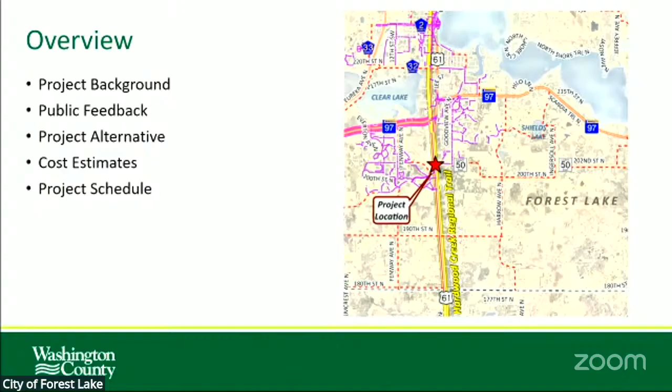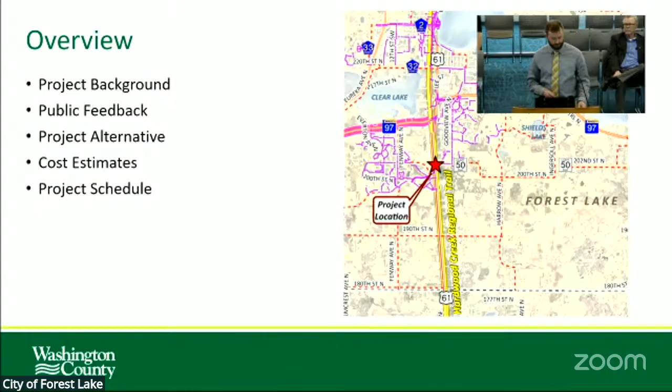On the map here, County Road 50 is in the southern portion of Forest Lake, just north of Headwaters Parkway and north of the new environmental center there. So that's the intersection at hand.

Some quick background: Trunk Highway 61 is the main north-south highway here with a 50-mile-an-hour speed limit and high traffic volumes. The intersection is currently side street stop controlled, which can make access onto 61 very difficult, especially for vehicles wishing to make a left onto 61.

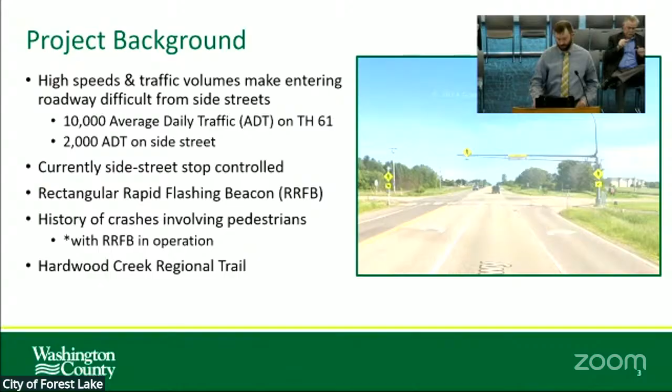There's an existing rectangular rapid flashing beacon at the intersection to help facilitate pedestrian crossings, although there's been a history of crashes involving both pedestrians and vehicles when those lights are activated. The Hardwood Creek Regional Trail is along the west side of the intersection, and that is the county's most visited and well-used regional trail.

So it's really a three-way cooperative project here with the Minnesota Department of Transportation, City of Forest Lake, and Washington County. As we mentioned last time, we've been busy seeking outside funding opportunities to make these improvements possible. To date, we've secured 2 grants and are working on a 3rd application. Previously, I noted we secured $2.67 million between some regional solicitation funding as well as through MnDOT's local partnership program grant application for improvements on 61.

The 3rd item we're currently seeking is an additional $2 million through the Community Project Funding Program through Congressman Stauber's office. So that's the 3rd chunk we're really striving to hopefully secure.

Quick project goals: reducing frequency and severity of crashes, provide safe, clear, and accessible crossings for multimodal users, and maintain acceptable vehicular operations well into the future.

So a quick refresher on public engagement. We held our first open house in July and second in September of 2025 down at the Headwaters Parkway Service Center. We had good turnout and received a lot of good feedback both in person and online, and really what we learned is that 61 is a barrier between the east and west corridors at this intersection.

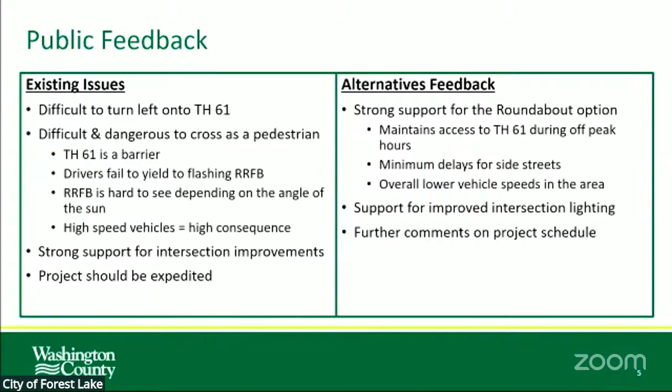The first open house really focused on existing conditions. We heard a lot about the difficulty making left turns, how dangerous pedestrian crossings are even with that rectangular rapid flashing beacon currently there, as well as a lot of excitement for improvements at this intersection.

In September, we brought forward 2 alternatives between a signal and a roundabout to solicit more public feedback on those 2 items. During this engagement, we heard a lot of support for the roundabout, largely due to their ability to maintain that side street access onto 61 during off-peak hours, as well as minimizing vehicle speeds through that intersection for all users, not just the folks that hit those red lights at the signals.

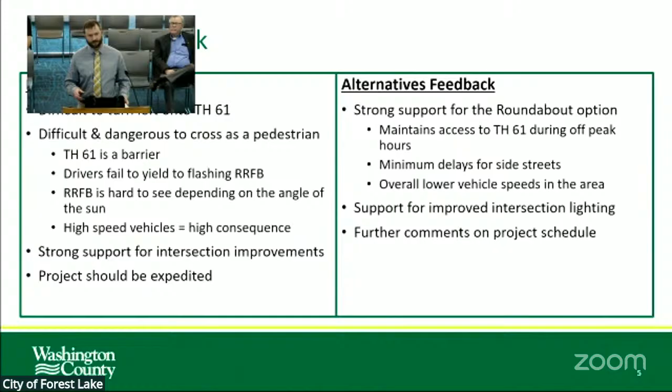So that's kind of what I have for background and public feedback. Any questions from City Council on those 2 background items?

Okay, hearing none. So with the roundabout addressing the needs of this intersection and being largely supported by the community, the project team developed several options for the roundabout at this intersection.

So on the screen here are 2 same but different layouts. Really the difference is how that roundabout is centered or structured within the existing trunk right of way. On the left image, the roundabout is shifted to the east, which puts part of the roundabout, the circulatory, partly outside MnDOT's right of way. But what this does is allow proper approach lengths on the west side of the intersection.

The image on the right shifts that roundabout back centered within the MnDOT right of way, which, to maintain those appropriate approach lengths, obviously shifts the road to the west slightly as well. So the option on the left results in shorter turn lanes for the future potential public works site on the south side, on the east side of the intersection, and it also causes a couple complications with some existing city utilities out there.

Neither of these alternatives are perfect in that sense. But one of the benefits of centering the route is it provides a little more flexibility to shift the roundabout location north and south, to really avoid the sanitary sewer crossing, which is the key piece because of the existing grades and size.

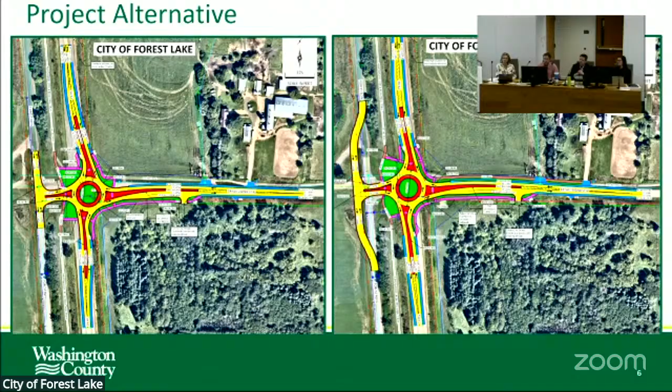I just think these roundabouts are challenging for pedestrians, and that has to be an important component of whichever one we choose. So is that just a policy that state and county won't help fund? This is a state and a county road, and we're talking about pedestrian safety, and that's why we're spending all this money. There's just no willingness to fund that.

Mayor, members of the council. At these single lane roundabouts, it's been Washington County policy not to put them in, but it's also been MnDOT policy as well, due to the fact that they can add more complications to the crossing. You'll get pedestrians coming up, some hitting the buttons, some not. Then are the pedestrians going to hit the buttons or just walk out? So it's one of those factors.

I'm not saying they don't improve safety, but if this was a multi-lane roundabout, they would be recommended. So it's not that they're not supported, they could be done as almost optional, but it's not something we'd recommend if this was purely a county or MnDOT decision. Mayor, the rectangular rapid flashing beacons at Goodview and Highway 97 were requested by the council at the time, and that was the first project in the state of Minnesota to install those devices at a trunk highway crossing on a roundabout.

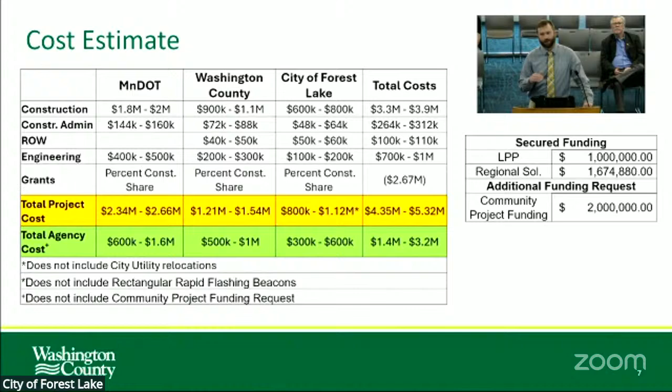The thing to focus on here is the City of Forest Lake column, the third one over. The yellow row is total project cost without any grants applied. The city share here I put as a range because we're still early, between $800,000 and $1.1 million, and that would be your all-in cost.

That includes engineering, any right-of-way needs, construction administration, and construction itself. The green row is a best guess of approximate construction cost share per agency based on our preliminary estimates, splitting up the $2.67 million through the breakdown here.

So that $300,000 to $600,000 is an approximation to get you a ballpark of where you'd land after those grant figures get divided. As mentioned, that doesn't include the future $2 million ask. If we get that funding, it's applied the same way, and everyone's cost shares come down.

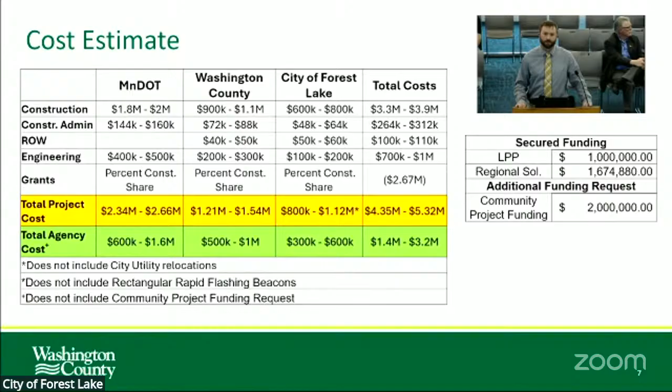As we've discussed, if the city desires to install these, we looked at costs, and it's roughly $165,000 to $200,000 for construction. Obviously there's also maintenance: vehicle maintenance, vehicle collisions, vandalism, and replacement of solar panels, lights, and the like.

Any other questions on that? Otherwise, that's the estimated cost, which was not included in the last slide. I kept them separate, so this would be additional costs.

Does staff have a recommendation yet on this part of it?

And add up the math with how many times that other one got hit—sorry. From 2022 up till now, I haven't finished yet, but it's been hit several times so far, about $1,000 worth of damage, not including Public Works when they respond.

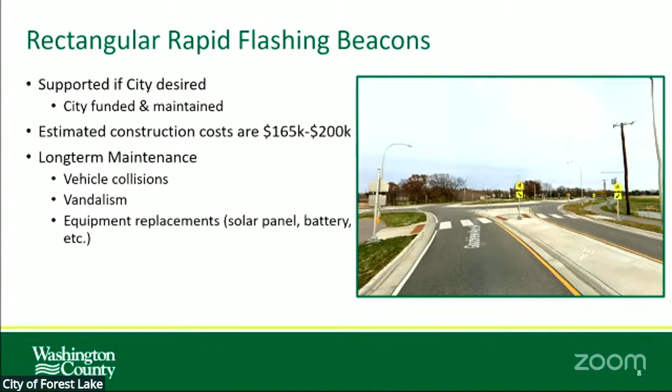Okay, real quick, just a reminder on the project schedule. Tonight, no action—what we're looking for is a resolution supporting the project. As Ryan Goodman pointed out, it allows us to move forward with this roundabout design, but it doesn't necessarily lock in the RRFBs right now.

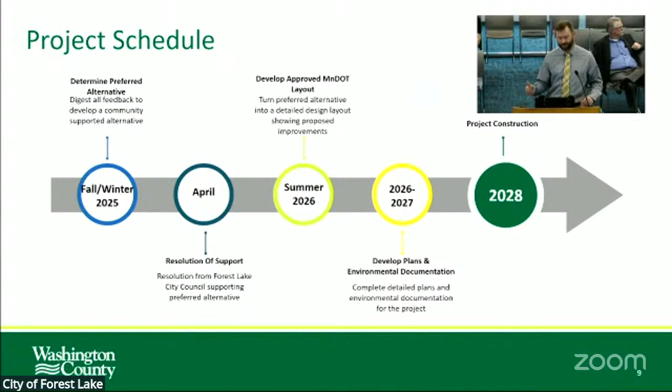Some of the finer details can still get worked out over the next year and a half, but it allows us to take that next step forward, knowing all agencies are on the same page in terms of our alternatives. Then, hopefully this summer, we'll develop a level 2 layout, basically a 60% design slapped on a big piece of paper you've probably seen in the past.

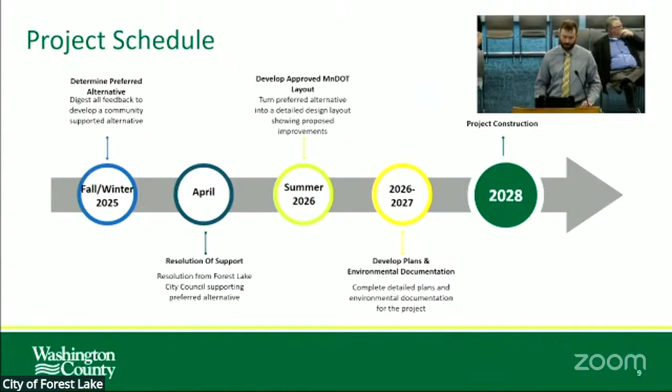Then we'd work through final plan development through 2026 and 2027. This is federally funded, so we have a lengthy environmental process that takes 6 to 8 months for some agencies to get back to us with their reviews. So there's a timeline constraint, but we've got time here for planned construction in 2028.

So otherwise, that was it—that's all I had. I guess any questions, thoughts, or departing words for us to take back?

So maybe highlight some of the positives. Cost, maybe safety isn't as much of a concern on these roundabouts as a traditional intersection with signals. I agree with Councilmember Miller that looking at that looks intimidating with all that crossings, but clearly it seems like the county has, this is the plan. You're doing more and more roundabouts than you are signaled intersections, correct?

Yeah, Mayor. So roundabouts offer a few benefits. That is, speed. We talk about fatalities in traffic, it's related to speed. Roundabouts, they're gonna slow every vehicle down. Signals, you come up to it, it's green, you start speeding up as you get closer, then it turns yellow, you start speeding up in hopes to make it. So not everyone's slowing down at a signal.

They're obviously safe, but on the county side of things, we see our pedestrian accidents, not fatalities, accidents, largely at signals. People turning right, you're looking for cars, you go to take that right and there's a pedestrian right there. So in the county's experience, the roundabouts have been safer for all users.

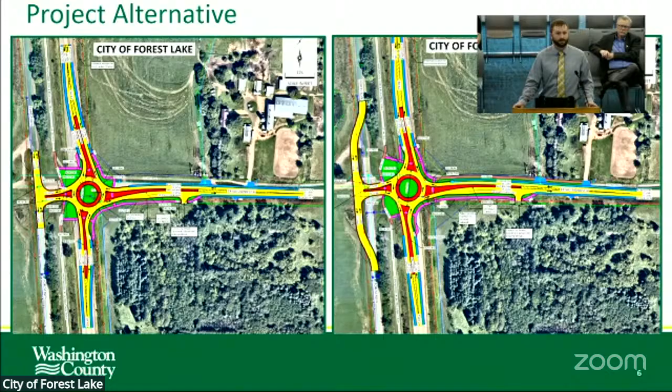Well, it's definitely needed. I mean, with all the housing that's coming in there and the developing we're planning on, it just scares me.

Questions or thoughts? Councilmember Miller, just to expand on that, the county just solicited proposals for the corridor study for County Road 52, so there'll be a lot of that kind of stuff looked at as part of that study with the growth in that area.

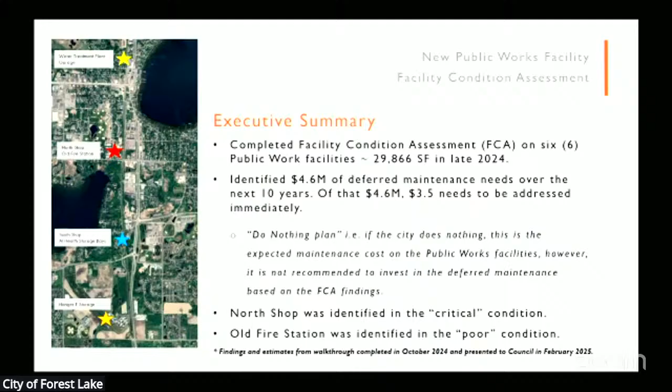Thanks, Jonathan. Mayor, council members, thanks for having me tonight. Just to give you a high level overview, these were the findings from the facility condition assessment done in late 2024. Approximately a year ago, I had a working session and ultimate follow-up on the findings from that study last February.

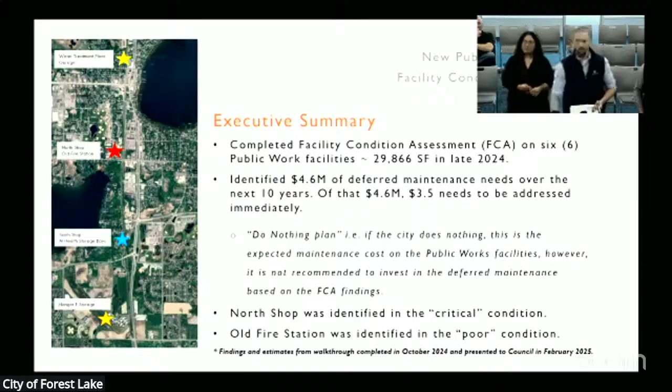As you know, the Public Works facility is spread out currently across 6 different facilities at 4 different locations. Ultimately, through the do-nothing plan or deferred maintenance plan, there was over 4.6 million in deferred maintenance needs. When we talk about a facility condition index or how we score these, this isn't an index that was developed by KA.

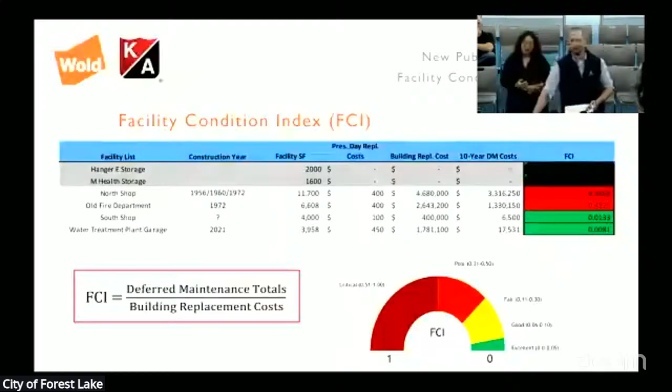This is a nationally recognized index that grades facilities based on deferred maintenance costs over the replacement costs of a given facility. Here's a breakdown of what that 4.6 million looked like across all of those projects.

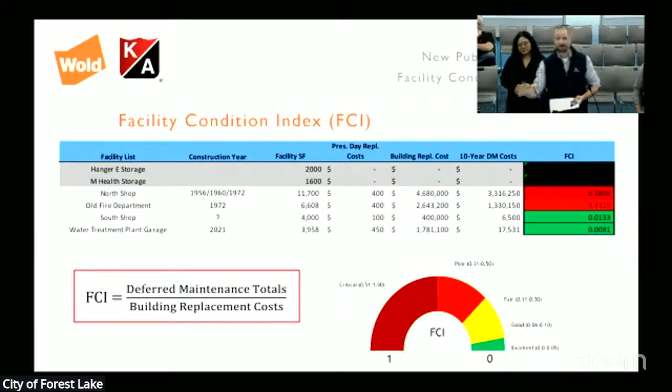Ultimately, you see in red the North Shop and the old fire department, which make up the bulk of your square footage of existing facilities today. They're in both critical and poor condition, which is a recommendation to divest. It's easier to replace the facility than to go in and do the repairs needed. It's also important to note that in a facility condition assessment, you're not looking at adequacy, you're looking for like-for-like replacement within those facilities.

These next couple slides, I'm going to skim through and just give you the high level, but they're photos from that facility condition assessment across all of those facilities.

These photos really highlight that with the current facilities you have, you're making as much use out of the space as you possibly can. The way you're fitting vehicles, equipment, and materials within these spaces, you're really cramming inch for inch.

As you saw on the recap slide, the dates of these facilities and original construction, some of them dating back to the 1950s and 60s. You can see on the exterior, in some of those lower right photos, structural concerns.

As you've fitted out these buildings, you can see in that lower left corner, the staff is really doing a good job of reutilizing things they find across the city, whether that's park benches or tables or washers and dryers. They've been making do with what they've had for quite some time.

So that is a high level recap of the facility condition assessment, unless there are questions. Otherwise, I'm going to give it back to Wold and we're going to talk through space programming.

Prior to transitioning over to SD, as part of that pre-design study, we did go through a programming exercise and looked at the actual space needs. Dustin touched on the condition of the facility, that's one big piece of it. The other piece is the effectiveness of the facility, and whether it has not only the right types of spaces, but are they adequately sized, are they organized the right way. We exposed a lot of different shortcomings of the existing facilities.

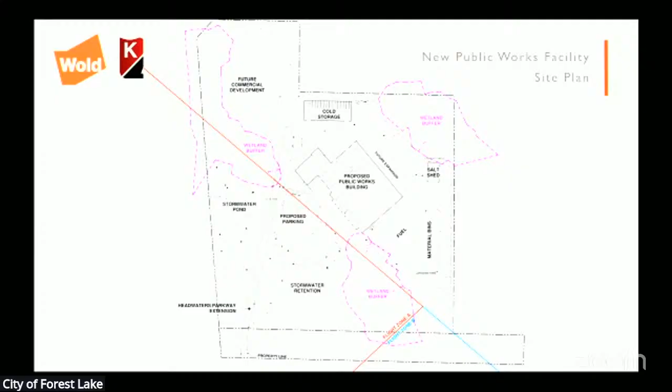I'll do a quick run through of the progress and where we've landed with SD. Obviously we are just at the first stage of design, so none of this is set in stone. It's all malleable, but with the feedback of the core group, this is where we're at at this point.

From a site plan perspective, here's the new proposed public works facility. We'll go more in depth on the floor plan in the next couple slides, but we are contending with, if you remember, the airport flight zone restriction, that's this red triangle here. Essentially we cannot locate the building in that footprint, so we are trying to stay outside of that zone.

Another restriction around the site are the wetlands that exist there today, dashed here in this magenta color. Working around those, we've established the Headwaters Parkway extension on the west side of the site. To maximize efficiency of our site, we're looking at splitting the stormwater retention, sized for what we're calling the future commercial development at the northwest corner. We've left a zone available there, and also a future connection up to the road to the north.

Off of Headwaters Parkway, we've got the proposed parking lot, for both public and staff vehicles. Circulating into the site on the north end, we've got the cold storage building. We've dedicated a zone for future expansion, left unbuilt for now, just to make sure we're not locking you in long-term to something that's not usable or can't be modified in the future.

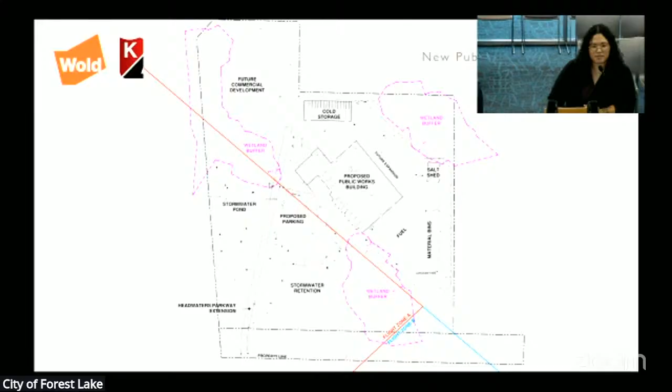As we dive in closer to the site plan, I've got zoomed in views for each of these, but overall we're looking at the north side of the building being our main office area, knowing that has more prominence there, closer to the street, trying to give an attractive view for those driving by. Along that front, as we move further south, we've got the division workshops and maintenance bays. The largest portion of the building is the vehicle storage, our garage and vehicle parking component.

We are looking at a mezzanine space just for added mechanical and storage over a portion of the offices, off the mechanics bay, and over a portion of the parking spaces.

The office area has two separate entries planned: a public entry on the northwest side of the building, and a staff entry for ease of access as they come in daily.

Off of the main lobby, we are looking at a training room. Some of the feedback we heard from our steering committee was prioritizing that as a public component or amenity that other city staff or the public could utilize, so that's located off the lobby. There's a functional component too, making sure it's usable as a break room for public work staff, so it can be accessed conveniently from their primary work area.

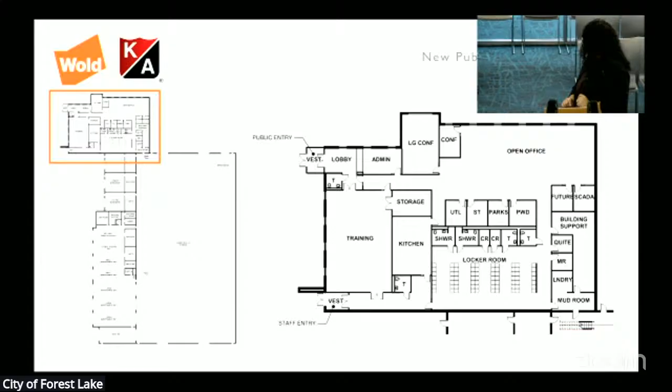What is the total square footage of this part of the building programmed? The office area is around 11,000 square feet.

From that 11,000 square feet, some folks from the steering committee have seen that over the course of time we've actually cut quite a bit out of this space. We originally had a separate training room, a lunchroom, and break room space too, and there's other areas where we've trimmed down in that locker room area. But sharing that kind of cafeteria and training room space was a big shift that got us down quite a bit in square footage.

So I won't necessarily go through all the ins and outs of that, but it's probably important to know that with the support of the steering committee and the staff, we're able to continue to look at ways to get this done efficiently.

City Council, so I know we don't have any women employees right now in Public Works. How would you, in the future, let's say we have all of a sudden 3 or 4 ladies, how would we divide those showers in that locker room to accommodate them?

I guess we don't often see that they're necessarily assigned. Those are all individual occupant rooms, so as people need them, if you need to jump in the shower, you'd just go in whichever one is open or available. But if you're changing your clothes, are you standing in the shower or out in the locker room? Oh, we've got changing rooms included. So there's 2 shower rooms, 2 changing rooms, which is essentially just a bench, a glorified closet space, and then a couple of toilet rooms.

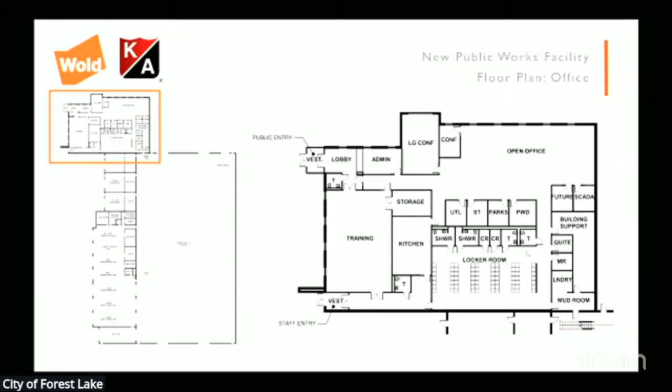Yeah, maybe I don't know if we can zoom in on that. Is this a PowerPoint or a PDF? I can see them fine. Just to note, if you look above the R, that's where the actual shower is, and then the rest of that space is a single use area to sort of change. There's still a bathroom and a toilet in there. So these are all individual use spaces.

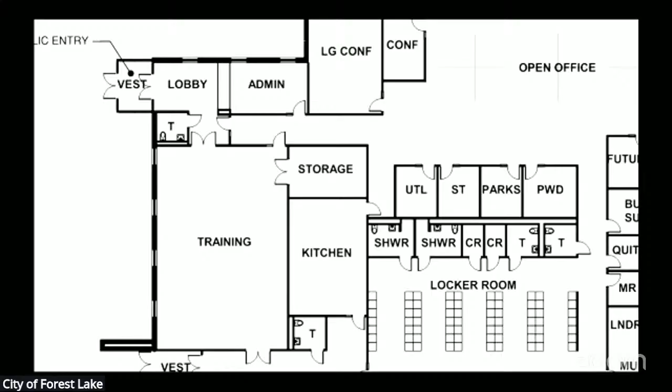And that's the benefit of doing it this way, people store their stuff in their individual lockers out there, but they're really changing, showering, going to the bathroom in those single use spaces. I've seen it where oftentimes females feel more comfortable if something's assigned, and there's nothing stopping Public Works from saying this left one is for females only. I'd say there's still adequate space for the men to use the rest of those facilities without feeling like they're stacking up on each other.

So as of right now, it's meant to be flexible for those changes in staff. I think 25, 30, 35, 40 years ago, Public Works employees would come in their street clothes, change into their work clothes, work, then change back. That's kind of changed as time has gone on. At least all my staff just show up ready to work, and when they leave, they go home in those clothes. It's more of a locker room where you have rain jackets, snow pants, or Carhartts, where you're coming in to change into something different, or if you get soaked doing a job, you can change out.

So having that open locker room is just more efficient, because if you have two separate locker rooms, a men's and a women's, right now you have more men than women, but you might have a time where you have more women than men, and all of a sudden you have a whole room that's just empty. This way it'll flux with men or women, it really doesn't matter the count. So I think this is way more efficient.

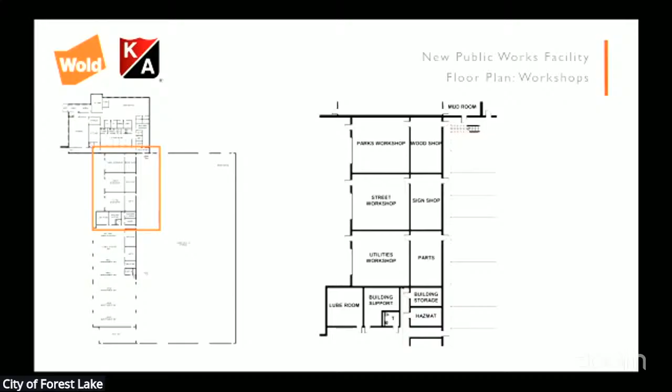Right, so as we move further south, we are going into division workshops. Essentially a working area, a garage stall with space for part storage, tool storage for each of the divisions so that they can work outside of the mechanics area safely on whatever projects they have going on.

We've also made this multi-use and also locating some of the shared amenities. They're kind of co-located with shops that use them the most, but really the wood shop, sign shop, and parts are all kind of a shared amenity across all divisions. So trying to locate those close to the mechanics area and also close to the office so they're accessible by staff. But obviously they're just more of a functional space outside of the office zone.

And then as we move south, we'll start transitioning into the mechanics area. So we've got the lube room with all the fluids and storage tanks that we'll have located in there to disperse out through the mechanics bay. We've also got a general building storage, hazardous material storage, and then more just building support, mechanical, electrical that can certainly start to trim up as we get further into design.

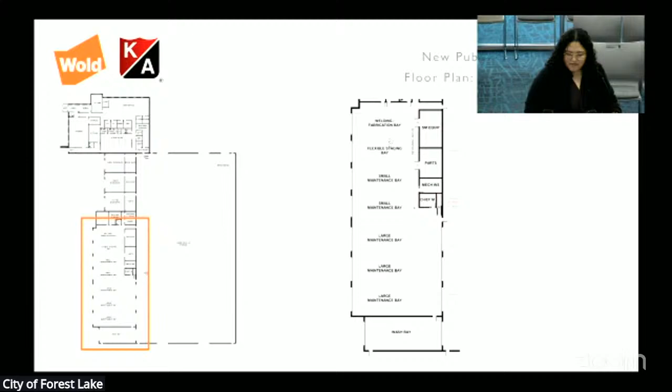And then as we keep moving south, those open into our large open mechanics area. So we had started with initial programming of having 2 small maintenance bays with another small flexible staging bay of a similar size. At the very north end, we've got our welding and fabrication bay assigned there.

And the flex and staging bay, what the intent of that is, if you've got a project, maybe you're waiting on a part for a while, it doesn't take up a whole operating bay, right? You've got some flexibility to kind of leave that there and not have to tow it elsewhere out of the site until that part shows up. Or if something kind of comes up last minute, you've always got a bay open there.

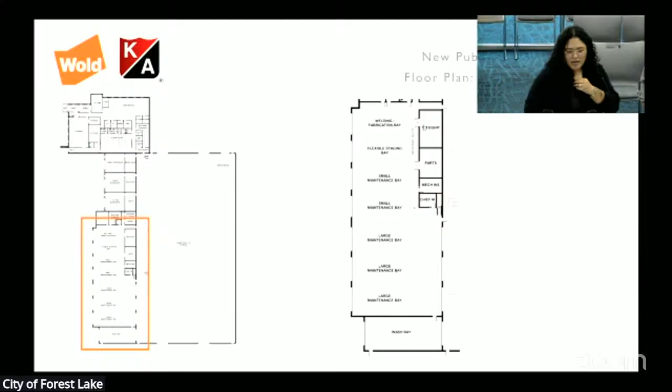And then we've also got 3 large maintenance bays. Those are drive-through or have the ability to drive through into the main vehicle garage. And then the last stall here at the south is the wash bay, which similarly you can drive through from the exterior into the interior. Off of those small maintenance bays, we've got some of the supporting small equipment areas, parts storage, and then the mechanics offices. So they've got direct view into the maintenance bays.

And then obviously the last remaining area, just that vehicle storage. So we're looking at 2 main drive lanes through. We've got in the center row, oversized vehicle parking so they can kind of drive through, pulling in, and then pulling out as you move north. And then spots for smaller trucks or pickups, on the east and west sides of the garage area.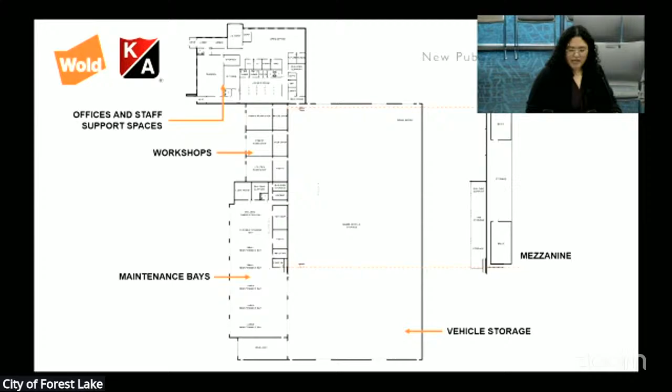Any questions on floor plan before I keep moving forward?

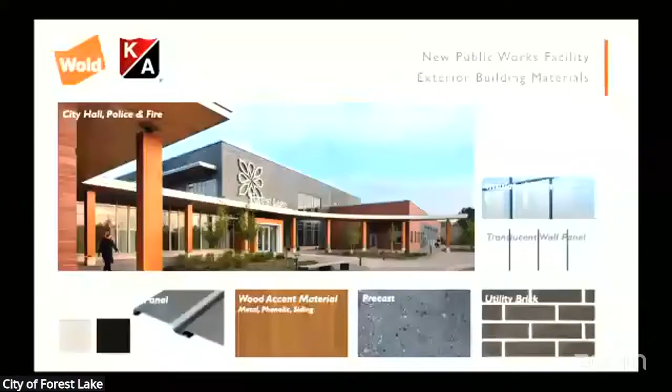No? Okay. So we are in schematic design, but we have started looking at some thoughts around materials, massing, what this starts to look like. We're very early on, so this is all subject to feedback, but we have kind of gotten feedback from the steering committee on looking at this building here as kind of a baseline of inspiration for materials, trying to create a cohesive kind of identity around municipal buildings.

Obviously, we know with public works, it's a very hard environment, so we want to make sure we're looking at really durable materials, but also still want to maintain an attractive front, right? If we are receiving public here for training or services here.

So we are kind of looking at precast as the main structural component. It's really durable, long-term, and then also looking at how we can accent that in certain key areas with metal panel, wood look material, brick, and looking at different glazing components that we can install around the building to prioritize daylight to these spaces as well.

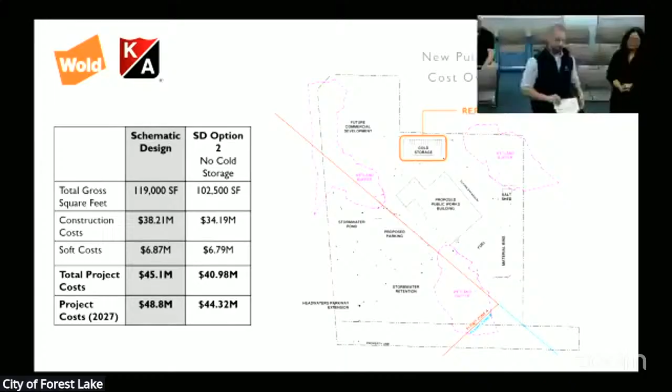But option number 2 is just the removal of the cold storage facility. So that takes you from 48.8 million in total project costs in 2027 to 44.32, roughly a savings of $4 million.

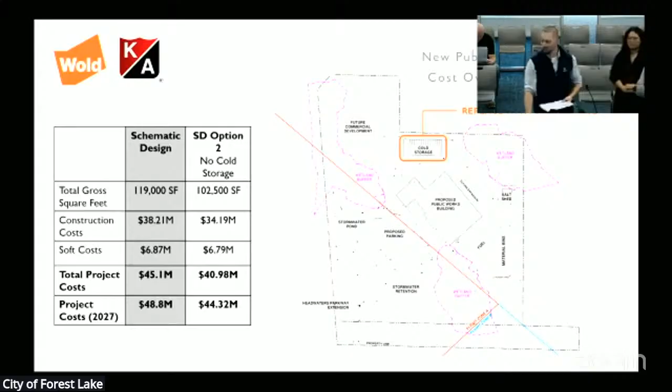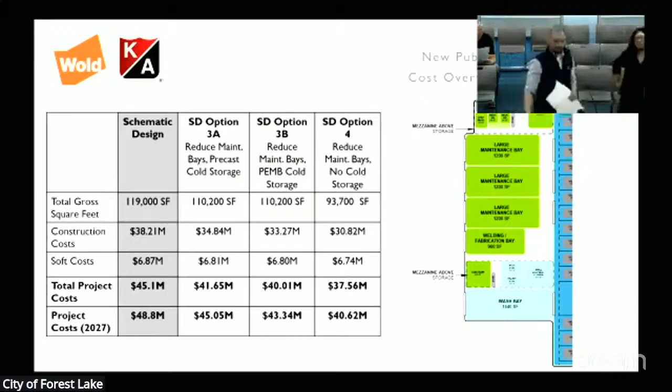We're going to go down, feel free to tell us to hit pause here if there's questions on any of these. Then we're going to go into multiple different variations for option 3. This is a reduction in maintenance bays, roughly by half.

I know we've had those conversations on what that means in prior sessions, but if there's a desire to recap that, we certainly can. I'll just say the biggest factor there is an agreement to not maintain all city fleet—this building would just be for public works. So instead of taking on fire, police, others, it's essentially just public works, and that allows you to probably maintain the current staff, or thereabouts, but have adequate maintenance bays for the vehicles you'll continue to maintain.

So if you take that as a given across option 3, the difference lies in the cold storage. 3A is a precast cold storage, which is in alignment with your building ordinances. Option 3B is PEMB, pre-engineered metal building.

I believe that would require a variance with the city in order to construct, but we wanted to provide that as an option for you to consider, just because of the reduction in cost you can see going from a precast to a pre-engineered metal building based on the sizing.

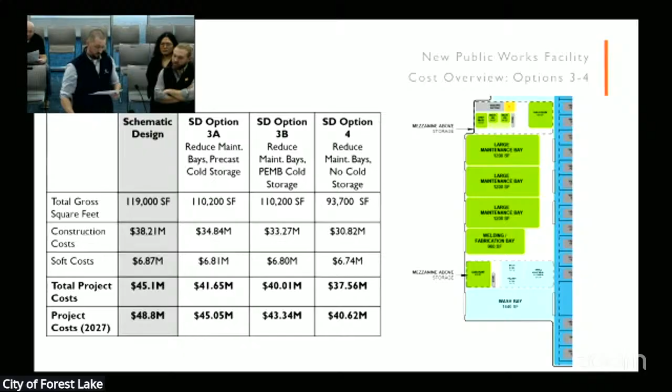Ultimately, option 4 here is not only the reduction in the maintenance bays, but also removing the cold storage in its entirety, which gets you down to roughly 40.62 million. Yeah, I think that's rest on here.

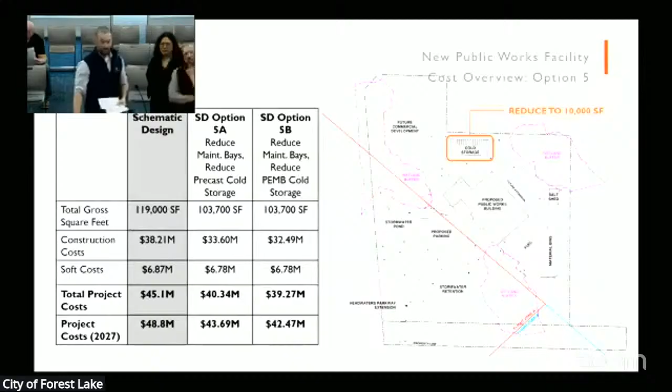As we go into option 5, it's a reduction in maintenance bay, and it also reduces the size of the precast cold storage, which takes you down to just shy of 44 million. Option 5B, with the pre-engineered metal building instead of precast cold storage, takes you down to just over 42 million. There will be a summary slide at the end with all of these options tied together.

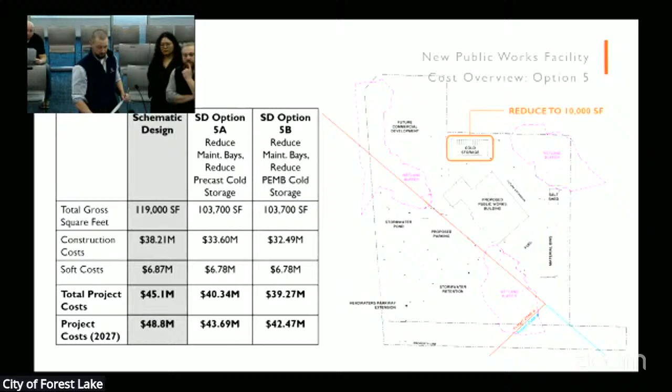For 6A, it's a simplified footprint of the facility itself. Ultimately, that results—this is looking at a 2-story office condition—in bringing us to a $43.5 million total project cost.

I'll say the difficulty in a 2-story option is adding square footage, because you've got essentially stairs and an elevator you have to add. So while you can reduce some of your exterior shell costs, roofing, and exterior walls, a lot of the foundation costs, elevators, and stairs offset that a lot of times.

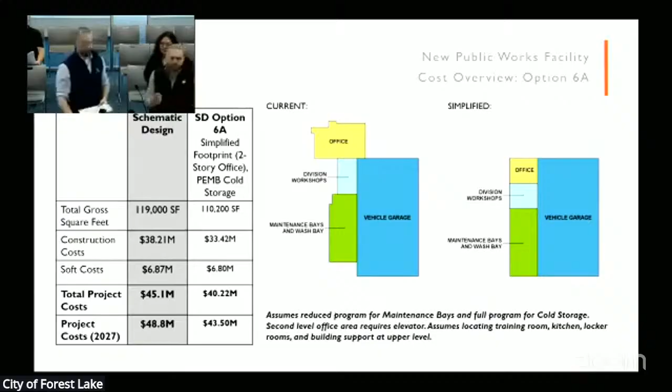When we're in the pre-design phase, usually if there's a question of whether to do 2-story or single-story, we don't usually view that as a big cost difference. It's not until you really get further into design that you understand whether there'd be implications depending on site adequacy, adjacencies, or whether you could even have a stair in a certain design.

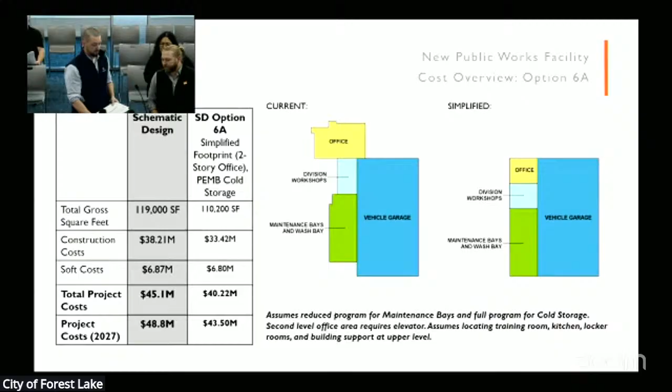So right now, we're suggesting there's probably not a huge delta if you go to a 2-story solution. Then to go to the next piece, looking at just a squared-off building that was all single story.

I'll say that we didn't really have anything to go off of there, only because we didn't redesign the building and all the adjacencies that the office space took. So if you looked at the previous floor plan, we kind of have that office as an appendage to the rest of the building.

And some of that has to do with it just being a quiet sort of workspace, as opposed to maintenance bays and vehicles moving in and out. Another component has to do with daylight and trying to make sure you get a good exposure to that space, and have areas for the public to traverse around the office area.

If we were going to square it off, it challenges where the adjacencies are within all of the components we've already designed. So we could continue to walk down that path, but we'd really be going backwards and designing it in a way that didn't meet all the criteria we have now.

So I know that was sort of a question put out to us. I'd say that if we took the exact same square footage and just arbitrarily squared it off, made it rectangular, using the same square footage you're at now, you're probably saving maybe 100 to 200,000. And that's only because you can work through the building process a little more efficiently, but you're still building all the same amount of square footage. So it looks a lot simpler, but you're still putting all the same stuff into it.

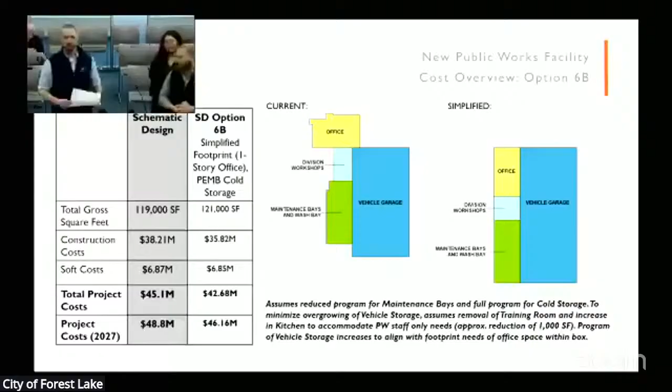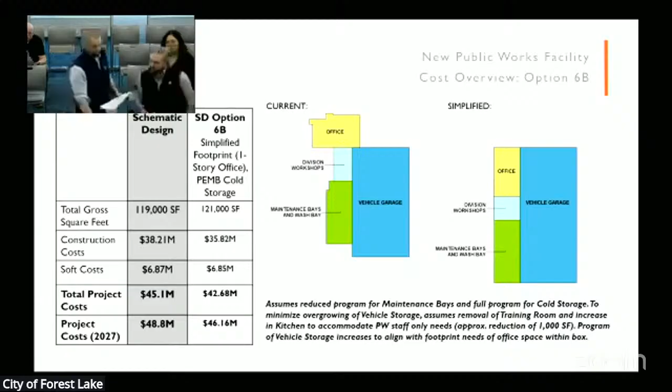Jonathan, how much square footage are we losing on the office and the division workshops on the right-hand side of the simplified one? Do you have an idea?

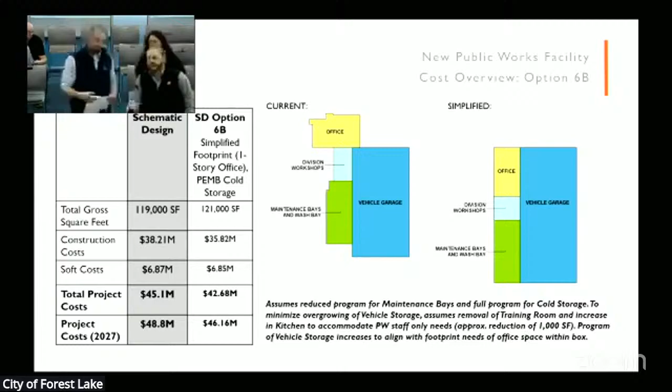No, I mean, actually, if you look at the diagram that we have, it's actually 121,000 square feet versus 119, because we essentially just took the boxes we had and squared them off without trying to cut back. So we actually grew a little bit to do that.

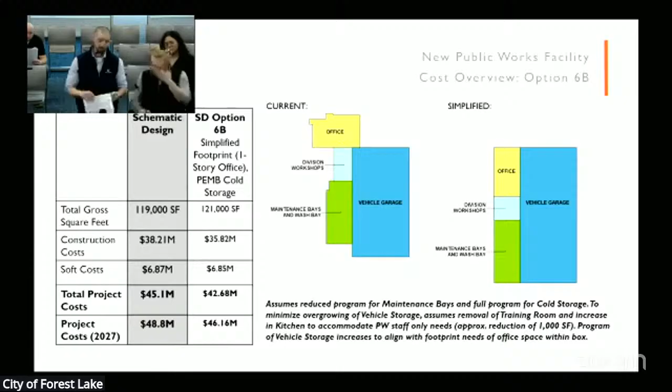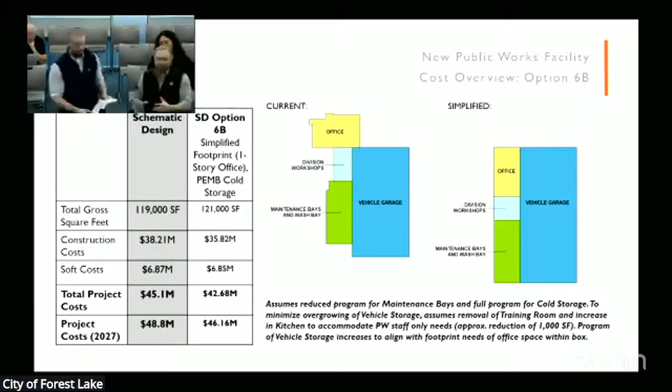I got a takeoff right here, Jonathan - it was roughly about just shy of 1,000 square feet, it looks like. And vehicle storage then increased by close to 10,000? Yeah, I mean, in order to get the box - if you look at the footnotes at the bottom, like maximizing the vehicle storage and trying to square it off, you really kind of lose that training room. That's kind of what we assumed would have to go to be able to get all the components to fit with the puzzle pieces we currently have, right?

Still add some features that make it look cosmetically appealing, but with potential savings by not having, to your point, an appendage separate with this office space. And this is the first time I'm seeing this feedback to the question. I don't know if it would necessarily have to be a square box, but if that office space, as it sits now, could be more of a tilt-up type construction design as opposed to brick and mortar or whatever, if there's some savings there at all.

Precast is by far going to be your most efficient from a cost perspective. We're starting to see a bit of a turn in the market with all the data centers going up - precast costs are starting to uptick from where they were in years past. But as far as we're pricing right now, masonry is still a bit of an uptick in cost compared to precast. You're right, there might be variations that could save between 100,000 to 500,000 dollars if you're looking at maybe not a complete box, but shrinking down vehicle storage. But it gets into what Wold's team would have to do, playing with numbers on clearances and aisle widths and things like that.

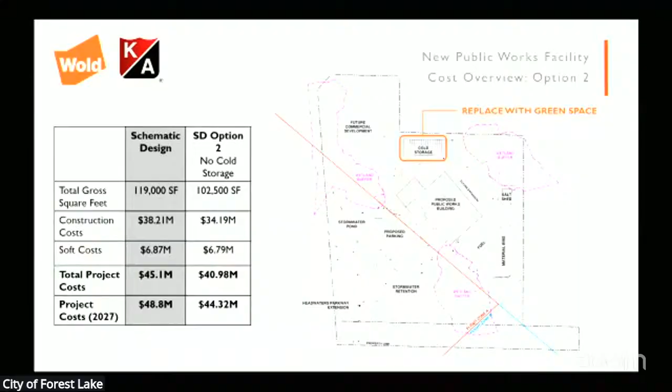Was the cold storage about a $4 million building? Was that the difference between the one option where we weren't going to do cold storage? Yeah, if you look at option 1 versus 2, it's about $4 million. I'll say that's for precast cold storage—that's for the precast, yes.

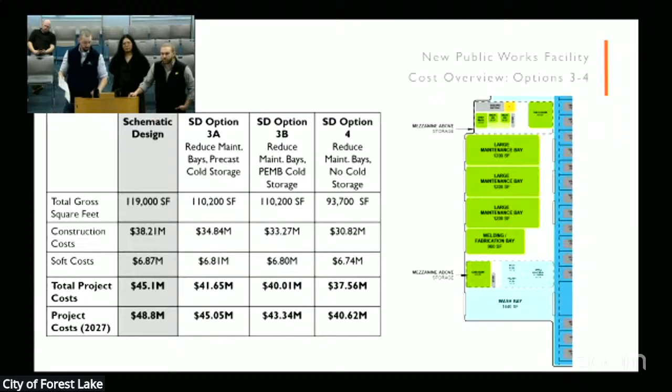But do you really want a metal building across from a future... no, I mean, there's a newer building at 97 and Forest Road, the cabinets or countertop place, which doesn't look like a typical steel building when you look at it. It's really nicely done.

Either way, with precast, but there's no FF&E included, that's $250 a square foot for a warehouse. That just does not align in the private sector—it just doesn't. $4 million at 16,000 square feet is about $250 a square foot. I don't know how that adds up.

I should mention too, at 16,000 square feet there is a requirement to have it sprinklered for the S2 building type, I believe. That kind of influenced what we looked at for option 5, reducing that square footage. So if we go below 10,000 square feet, then we do not need to do that sprinklering. So that is maybe a complicating factor too in that cold storage.

Very similar to precast, there's I think 4 or 5 different pre-engineered metal building types that are out there, and usually in the metro there's about 3 to 4 installers that tend to bid on that work. I believe I go back to Rosemount, and I'm almost 100% positive on this, that's a pre-engineered metal building that they use for their outdoor cold storage.

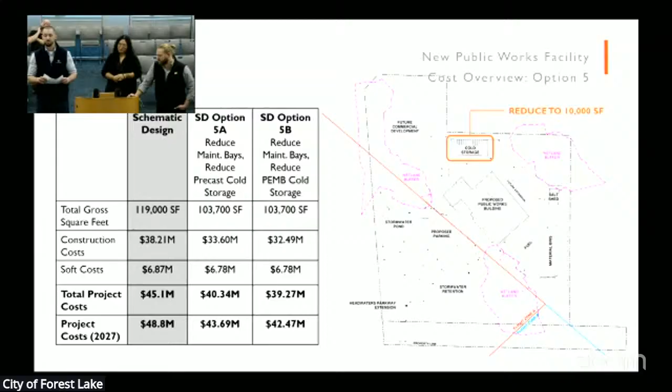Which cold storage space do we have today? Get it about, would say around that, if you add it all up. I mean, if we went with 10,000, is that hamstring you guys versus the 16? I mean, it seems like it saves us some money.

I think a lot of that 16,000, a lot of it was even putting trailers and stuff in there. I think if you strictly put the equipment in there, you can pare down what you put in. I think it's valuable to get everything in one spot, and then you can get rid of all these other spots too.

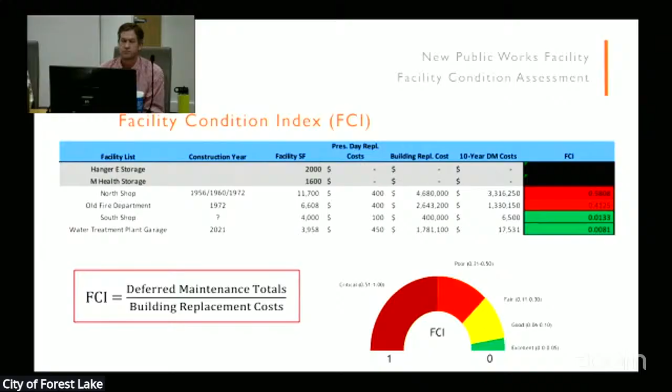Staff would be happy with 10,000 versus 16,000. Yeah, that too. Okay, you've got- I think you're at 7,600 right now. If you take the hangar, M-Health, and the South Shop, that's 7,600 square feet, a little bit of the water treatment but not too much. Yeah, Dave's garage.

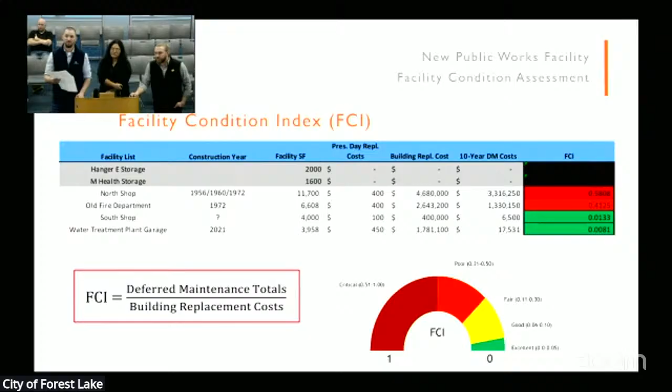So you're still getting some increase to that. And I should say that doesn't account for, like Dave mentioned, all the ancillary sites, random water tower, things like that too.

So the goal tonight, I mean, is this kind of a blessing, or what is the idea here to sign off on schematic design, not ask for some more? What is the goal tonight, or is it your consensus that you like one of these options and give a blessing on that, basically, as direction for staff and steering committee to go back and find a price point, or do we want to see a building that's boxed off in a rectangle shape, or do we want to see something different? I think either yes, we go forward with one of these options, or we want the group to go back with direction of how we want to come up with a new option.

Basically saying we don't want any of these options. We want a new option that is that price, a set design, or less square footage, you know, something.

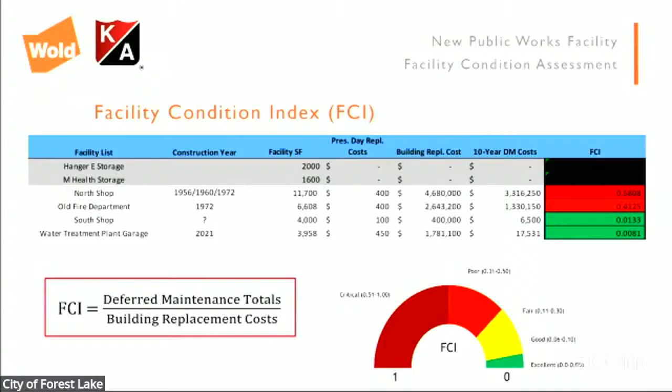Oops, that's fine, whatever. Yeah, we're at 18,000 plus cold storage. 18,000 square. What was the current space need? That's just the current existing state. What's your question again? Sorry, you were asking what's the current need for square footage, and the difference between what that price would be. Yeah, I think the difference was maybe like 20,000 square feet, and it had more to do with vehicle storage than office space, because office space you're only going to add a couple people maybe. So that was a pretty small component of that increase in square footage over the course of 20 years. It was more about, as we buy more vehicles and try to maintain a larger footprint of roadways and things like that -- that increase was more to do with vehicle storage than anything else.

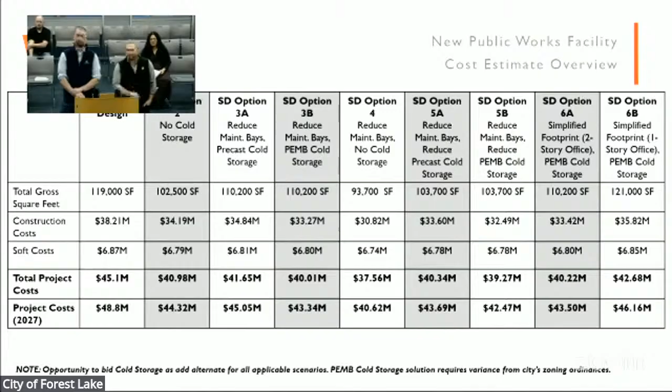So, fixtures, furnishings, equipment. When we look at public works, there's a divide sometimes between what actually gets bid out as part of the project - for vehicle lifts and some of the more intricate things that go into a building like that - as opposed to just a chair or a desk. So those are kind of your big buckets typically out of that soft cost. It's just not the hard bid that you'll see on bid day - all the other things that add up to get you there at the end, so you know what the actual budget needs to be.

So on bid day, what you're saying is they're not going to necessarily figure in those soft costs? Yeah. I mean, those soft costs are there all the way through to the very final check being written, because you'll go through and maybe reduce some of the contingency, and the city might actually see that the number goes down over the course of time.

But you've got construction testing that happens throughout the course of construction. So you'll have your own independent group doing that, billing hourly for those tests. We won't know what that is until they're all completed and construction's done. So the soft costs tend to wiggle around a little bit, but every time we meet with our core planning group or construction group, or give council updates monthly, we're always dialing in on what those soft costs are, because we want to know if we're still on budget and how much contingency is left, so that we're always making sure there's some wiggle room.

And I've noticed on a lot of our bids recently, for road projects and things like that, we've actually been surprised how low some of them have come in compared to others. And I assume bid day will be going out to anybody who wants to put in a bid. Yep, that's correct, councilmember, that's a good point.

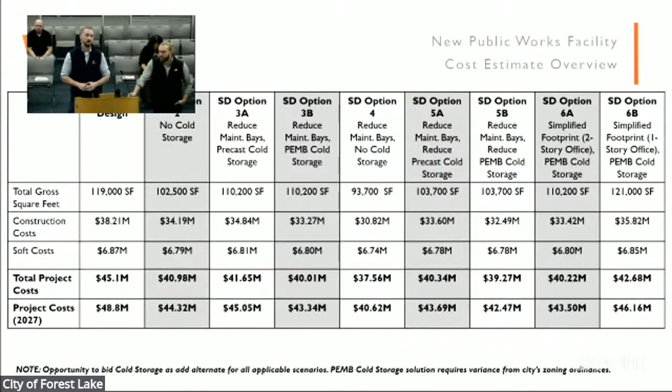The other things you mentioned, like tilt-up building or going with a simpler building, those are things our teams look at as you go through design development. There's already a value management list started between the construction management firm and the design firm that goes through things like, do you do an EPDM versus ballasted roof system? Sometimes the market fluctuates, one can be cheaper than the other. We say it's an easy alternate, put it out there and let the 5 to 6 roofers that are going to bid on this project determine what the best value is for the city, and then let the city make that decision on bid day.

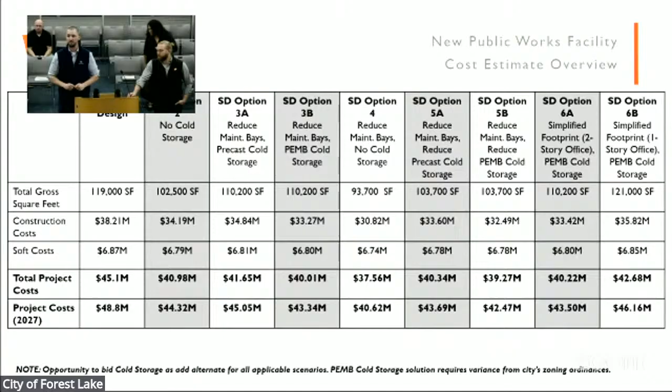So there are things the team should address, and construction management is something you'll talk about a little later tonight, but depending upon the team working alongside you, there are a lot of things within these facilities that simple material changes or things the teams talk about can make into easy alternates that can help get you below or closer to that $40 million mark, if that's the threshold. I know you said 35 to 40, and there might be other things to help reduce it further, but those are the easy ones coming off the top of my head.

But it sounds like there's appetite at the council to waive any fees that we would charge regular developers or contractors, correct? If that's the case, is there some appetite to look for variance and go with that precast, or the more metal, I don't know what the term is, for that building, if we were to do the cold storage?

Yeah, I think so, I'm fine with that. So a little direction there, yes, I don't know, but we still have to go through the whole process of variance, and also fees then, not to charge ourselves.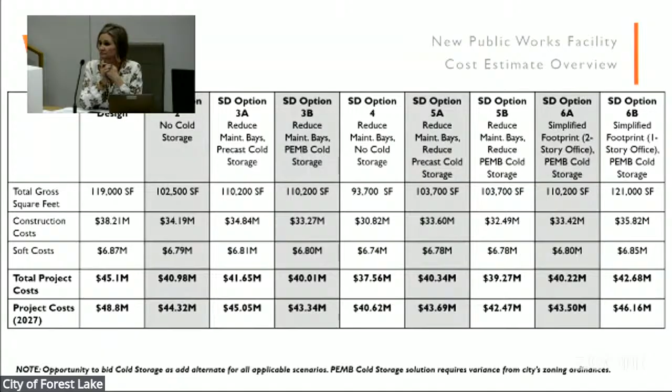Yeah, I mean, I'm happy to see some consensus there, and I think it's something we can work towards. I guess the question is, as we look to what's next here, would you like us to find a sweet spot to wrap up schematic design that hits that below 40 million?

Because I think some of the things that we're talking about in terms of savings have a lot to do with materiality and more specific building construction pieces that really has to go into design development and getting deeper into it, not just looking at a floor plan and some diagrammatic stuff. So I think...

In one way, we can keep dragging it out and figuring this out and see if we can get there with maybe the steering committee and core planning group. But in another way, we could also just come back to a formal council meeting and say, we know what the direction is and we're ready to move forward into design development, and that's going to be the target.

Yeah, I mean, just remind everyone that this part of it is $330,000. A lot of money. And so I think we need to get as comfortable as possible with this piece before moving forward.

So I think coming back to exactly what Joanne just listed there on some of those things, at least another shot at that, at least has to happen.

So then I'll jump to the very end. I think the first action item recommendation is project scope - I think we have that, and budget. So I think we have both of those and we're pretty close now. Beyond there, there's a couple other steps that should be discussed. One is, like I said, proceed with design development. You have our proposal that's based essentially on 3B, which was the core planning group recommendation. I don't think we necessarily have to talk about that anymore today because that'll just adjust as we dial in on where we want to be.

But then the last one is the project delivery method, and really starting to think critically about how you want to move forward with construction. If we're taking a month to smooth things out here, that would really be the time to make this decision, because you wouldn't necessarily want to go into design development not knowing if there's a construction partner, and who.

And then there's this fourth piece of community engagement strategies. I think today was one effort, but there's certainly other things that can be contemplated. I think Kraus-Anderson's got a couple of tools, we have some too, and it's just a matter of how much you want to hear about that or try to hit that head on.

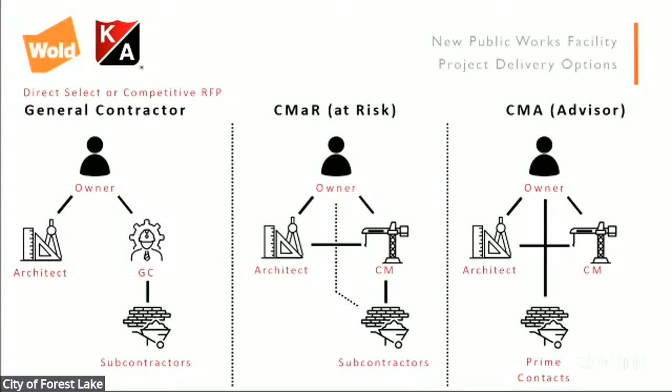I think one other thing to pay attention to, not to get too in the weeds, but in general contractor versus either CMA or CMAR, is the line between the architect and the construction manager. It's beneficial to have the construction manager working with the architect as you're going through design development, because you eliminate holes in your project. The architect is designing a building, but a construction manager is also looking at the plans and going, okay, there's a dead space here.

We're missing something here, or why isn't there something here? So when you get 100% construction plans, if you have the architect and a construction manager both looking at it, your contingency probably is going to fall down even more, just because you've probably found a lot of the gaps in your project.

Whereas with a general contractor, Jonathan wanted to design it, and then all of a sudden you hire Dustin and he builds it, and you'll go, well, I can't build that. That wall is supposed to be 6 inches this way. And then there's a change order, and because that's there, there's another change order.

So regardless of whether you do CMAR or CMA, having that construction manager on board as you're going through design development and putting together construction plans is just valuable, just so you're going to have a very good set of plans. The construction manager is going to be just as involved in construction plans as the architect, because they're going to know what they're looking for and how that gets built.

I would caution that if you're going design development, the sooner you can bring on your construction manager, the better. Just like they're assisting with schematic design. If Jonathan was just doing this without Kraus-Anderson assisting, he'd probably be missing some of these costs, or they're the ones helping with certain things.

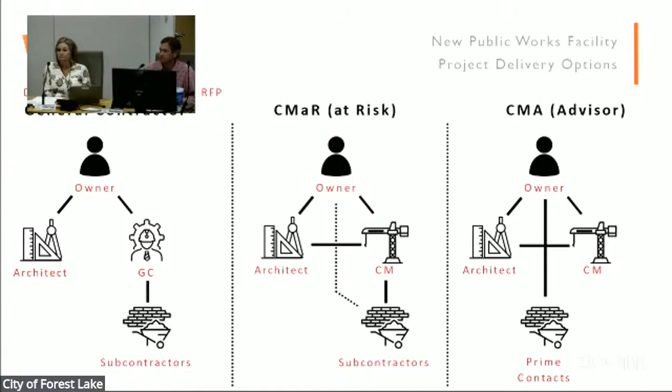Is that it? I do have one question. I'm confused. Sorry. No, you're fine.

When I was building and developing, it was residential. So at the CMAR, when the owner sends it out for bid, do you have a choice on subcontractors or not? It's actually a two-step process to go out for bids, council members.

In CM at risk, you have to do what's called a pre-qualification of contractors. Usually around design development, if the plans or specs are developed enough at the end of design development, you go out and set a list of pre-qualification criteria. Your construction management firm will have a pre-qualification booklet.

Does the city have input on that at all? The city does. We've worked with multiple cities that want to provide heavy input into that, and some that don't want to even touch it. So it's truthfully a matter of what you want to do and whatever level of involvement you want to have. But you have to go through pre-qualification.

That takes roughly two months. What ends up happening is you solicit out general information about the project. Contractors have to submit their qualification data. Any contractor that wants to bid on the project that qualifies submits their data. We go through it as a construction management firm and bring it back to you - here's who qualified, here's who didn't. You ultimately approve of that list.